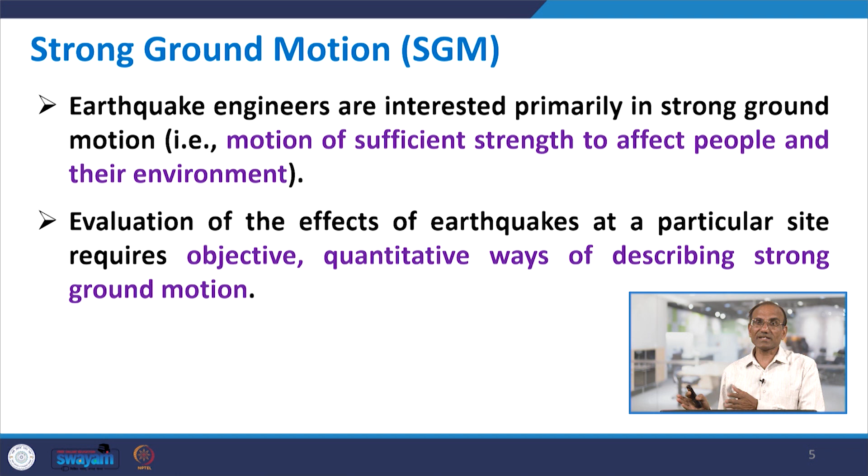To evaluate the effects of earthquakes at a particular site, it requires quantitative ways of describing strong ground motion. We need to quantify that in different parameters. So what are the parameters which quantify this strong ground motion, we are going to talk today.

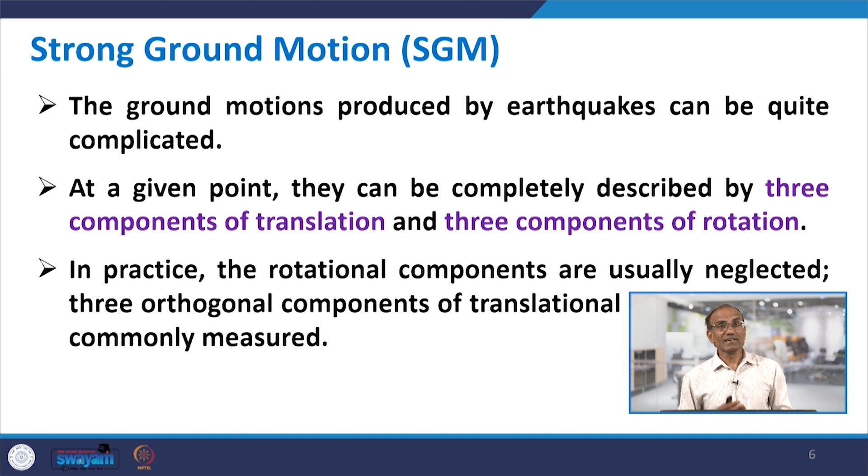The ground motions produced by earthquakes are mostly quite complicated. At a given point, they can be completely described by 3 components of translation and 3 components of rotation. In 3D space, you have 3 components of translation, like x, y, z coordinates, where you may have displacements and also rotations. In practice, the rotational components are usually neglected, and 3 orthogonal components of translation motion are most commonly measured.

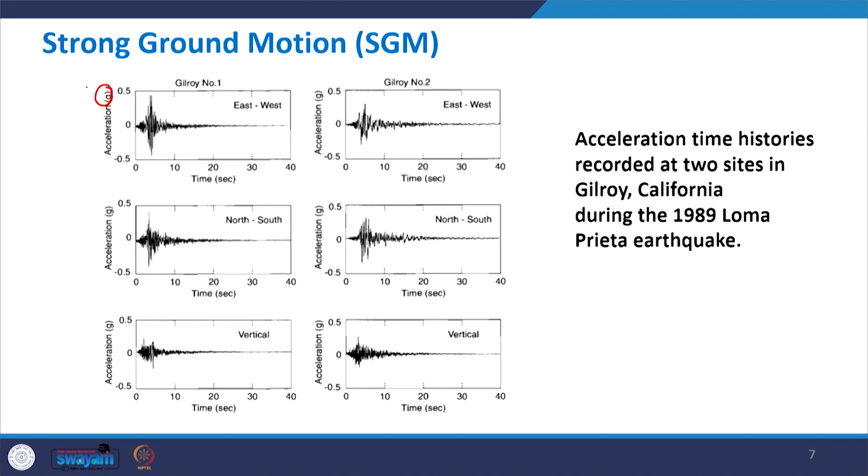In an acceleration time history, the x axis shows time in seconds, and the y axis shows acceleration, normally represented in terms of g, the acceleration due to gravity. So here, for example, 0.5 g, where 1 g is nothing but 9.81 meters per second square.

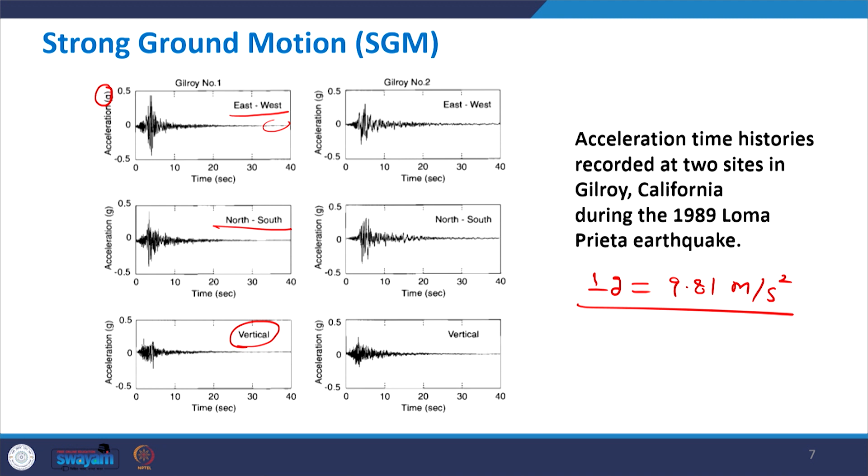For both sites we have three components of acceleration time history: east-west component, north-south component, which can generally be called lateral or horizontal components, and the third is the vertical component. All three components together completely describe the earthquake time history, for Gilroy number 1 as well as the second site. In these records, the values fluctuate a lot, starting from 0, reaching some peak value, and after the peak decreasing again, until at the end it becomes almost 0. When it becomes 0, that indicates the duration of the earthquake, which we will discuss in detail later.

Continuing with strong ground motion, what are the techniques for its measurement?

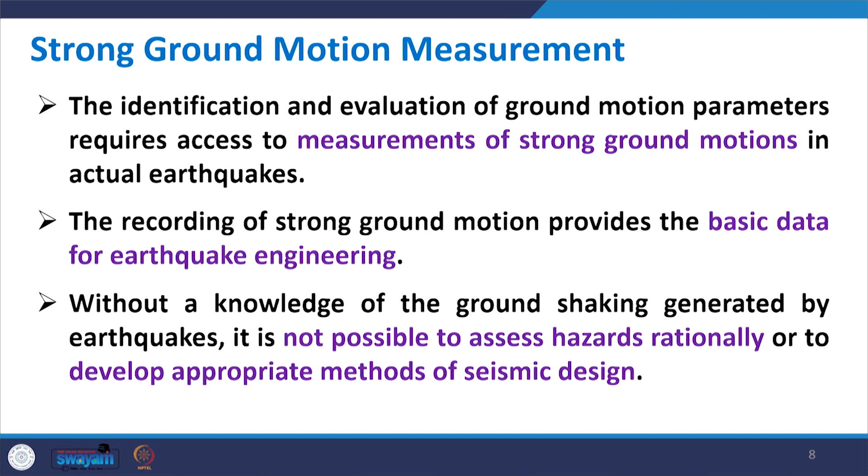The identification and evaluation of strong ground motion parameters requires some measurements for actual earthquakes, and the recording of strong ground motions provides the basis for earthquake engineering. Without knowledge of the ground shaking, it is not possible to assess hazard rationally or develop appropriate methods for seismic design. So we need to measure the strength of the ground motion, and accordingly design our structures or foundations so that they can survive.

Relatively weak ground motions are measured by seismographs, and the records they produce are called seismograms. Here there is one controversy: seismograph is not a graph, rather seismograph is an instrument which measures the earthquake, and the earthquake record itself is called a seismogram. So this should be clear, seismograph is an instrument which measures.

So for measurement of relatively weak ground motion we use seismographs, but for strong ground motions normally they are measured using what we call accelerographs, because our objective is to measure the acceleration time history, which is called an accelerogram.

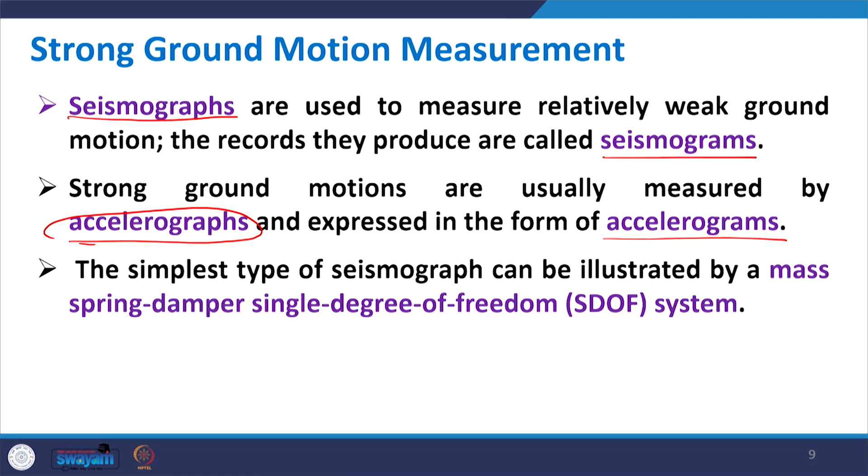The simplest type of seismograph can be illustrated by a single degree of freedom system, which consists of a mass, spring and damper. This is taken from Kramer's book. This is a simple ground motion measurement system, like a single degree of freedom system, with a mass and stiffness K and a damper C.

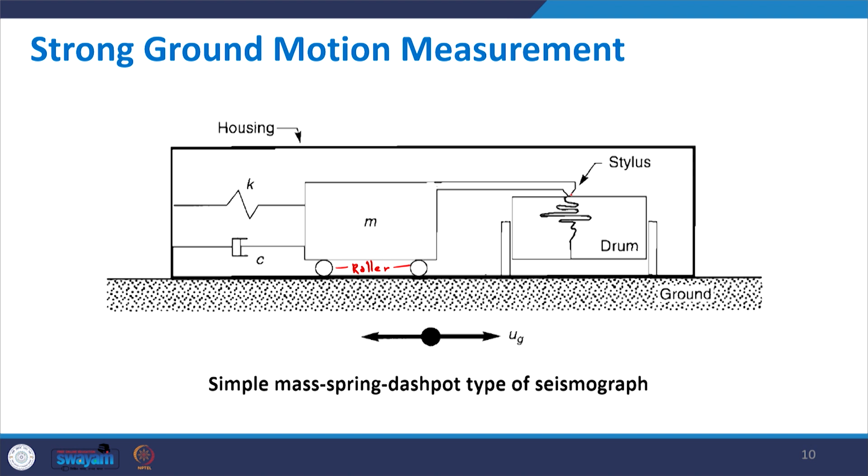This mass is situated on rollers, two rollers are there. When an earthquake wave comes in the lateral direction, the mass will move like this. As a result, this attachment will move, and there is a drum which moves vertically. On this moving drum you have a pen which will mark the wave, because due to the earthquake vibrations it will move and record while the drum is rotating.

This was normally the earlier design, because digital systems were not yet available, and usually the first kind of seismograph was like this. It was invented quite a long time ago, and successfully used since then. As I mentioned earlier, the first engineering record of an earthquake was during the 1940 El Centro earthquake.

The relative movement of the mass and the ground is indicated by the trace made by the stylus on the rotating drum, which we already discussed. A typical seismograph has 3 seismometers oriented to record motions: one vertical and two perpendicular horizontal directions.

Most accelerometers currently in use are transducers that produce an output in terms of voltage, which is proportional to acceleration. That means there is a variation in the voltage, and when acceleration increases, the voltage will be high.

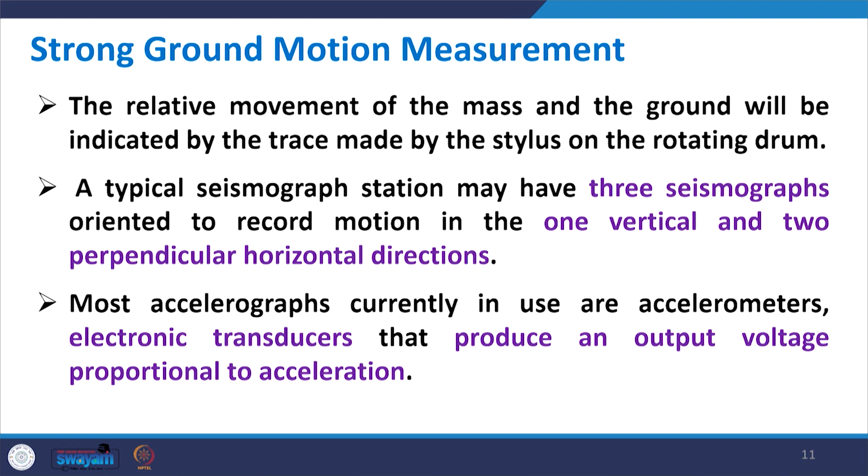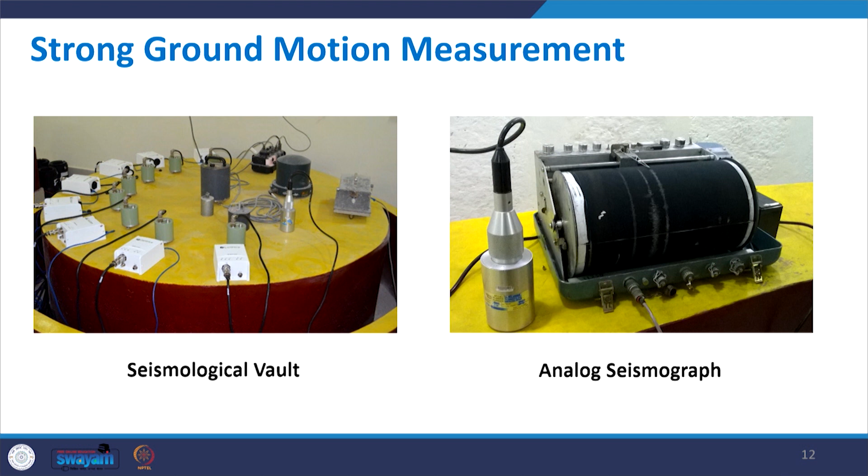Here are strong ground motion measurements. On the left hand side is a seismological vault, and on the other side are analog seismographs. Both of these photographs are taken from our seismology observatory located in the Department of Earthquake Engineering at IIT Roorkee, from our own lab. There is a vault, and at the bottom there is a base, on top of which, like on rock, instrumentation is done, normally called sensors. On the right hand side a zoomed picture of one of the instruments, an analog seismograph, is shown.

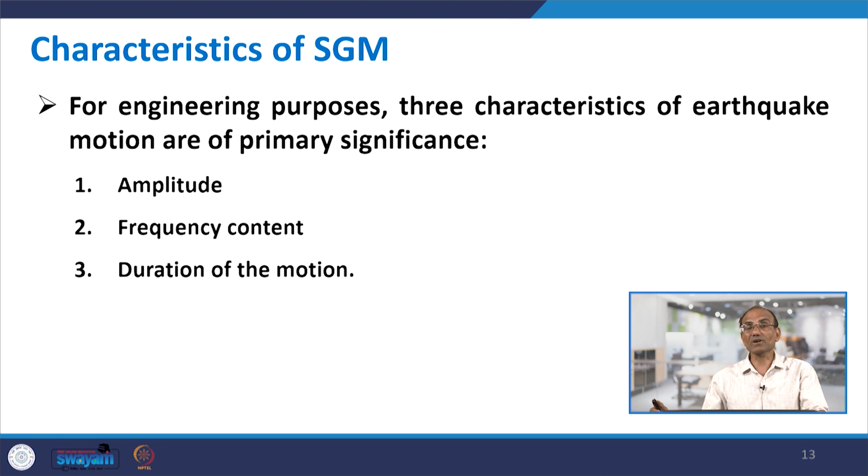Now it is time to characterize the SGM, which stands for strong ground motion. For engineering purposes, it is important that we characterize earthquake motions, and this is normally done using 3 parameters. First is amplitude of the motion, which indirectly measures energy content. Then you have frequency content, how the peaks and troughs change with time. And duration of the motion, meaning how long the earthquake shaking lasts. These 3 parameters together help characterize a strong ground motion, and in the next slides we will discuss each one by one.

Normally for amplitude, acceleration content parameters are used. The amplitude which represents acceleration can be represented by either acceleration, velocity, or displacement.

Similarly, for acceleration time histories, there is one difference: a significant portion of the time history is normally in the high frequency range, while displacement time history is dominated by relatively low frequency motion. So for high frequency, acceleration time history will have a large portion, while displacement time history has low frequency contents.

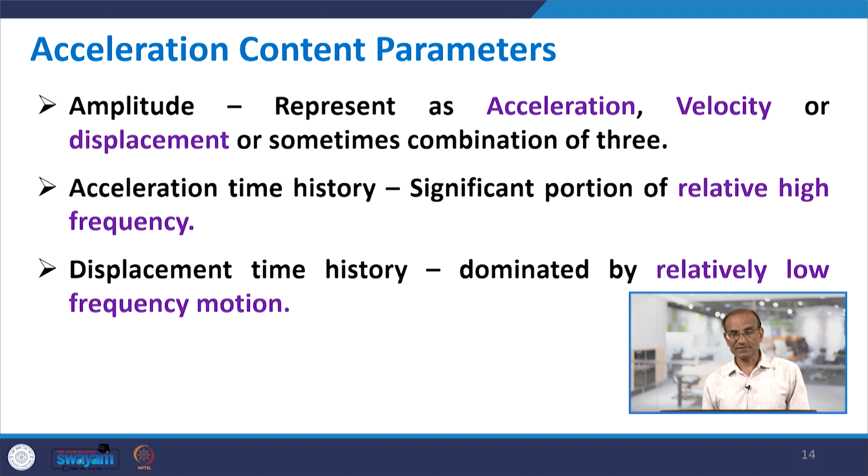For example, this is one of the acceleration time histories from the Bhuj earthquake of 2001, this is the lateral component. On the y axis you have acceleration and on the x axis you have time. This record lasted about 75 seconds, but you could see the signals are very weak up to 30 seconds. In the initial 30 seconds the peak values are very low, but after around 32 seconds there is suddenly a jump, and you get peak values around 47 seconds.

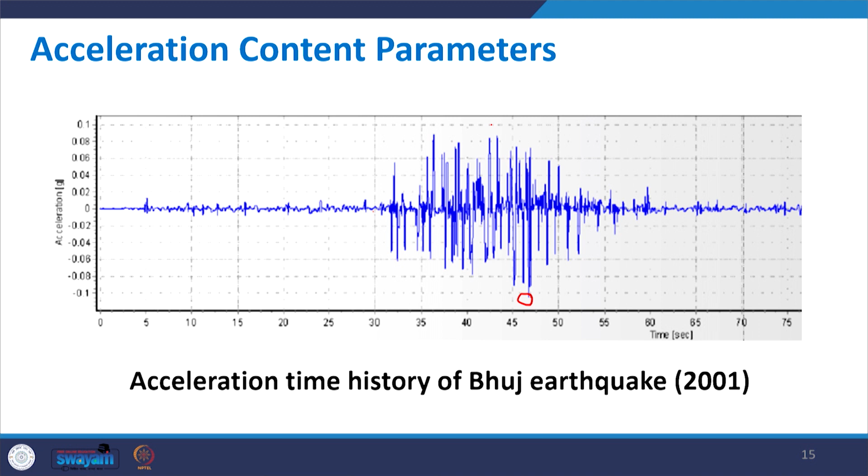When we talk about peak, our meaning is the absolute peak, it does not matter whether it is on the positive side or negative side. Here the maximum value is more than 0.1, but that is happening towards the negative side, so the peak will be here, not on the other side. So irrespective of whether it is positive or negative, we consider it the peak.

Now we collect the peak values and then we further process them. For the amplitude, the most commonly used measure is called the peak horizontal acceleration, PHA. This is the maximum value of acceleration in the horizontal direction, and the PHA for a given component is simply the largest absolute value of horizontal acceleration, where absolute means it can be on the positive side or negative side.

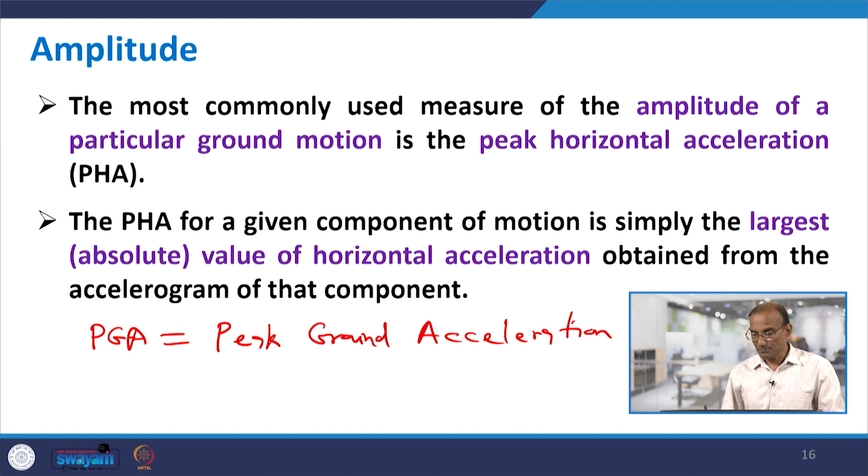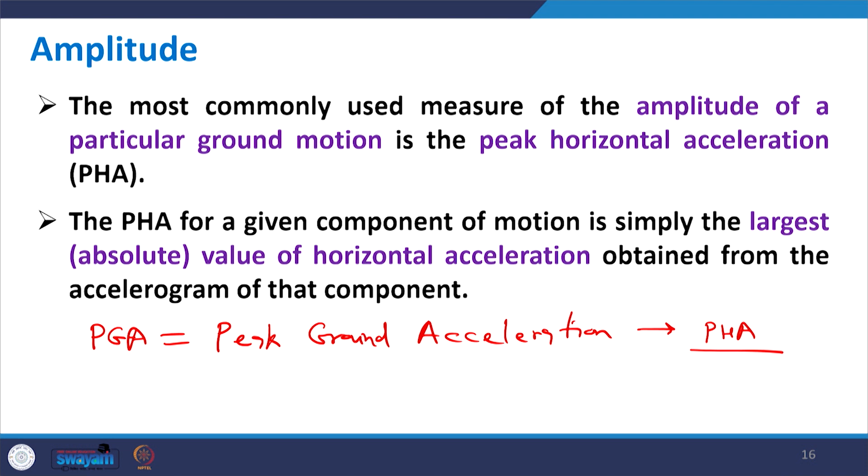Most of the time, instead of PHA, PGA is used, which stands for peak ground acceleration, and this term is widely used. Here instead of PGA we use PHA because it gives more clarity. When we write PHA, it is clear that this peak is in the horizontal direction, but PGA could be either horizontal or vertical. However, if nothing is written with PGA, it is considered to be in the horizontal direction, because the peak value in the horizontal direction is more important than in the vertical direction. We will discuss this later again.

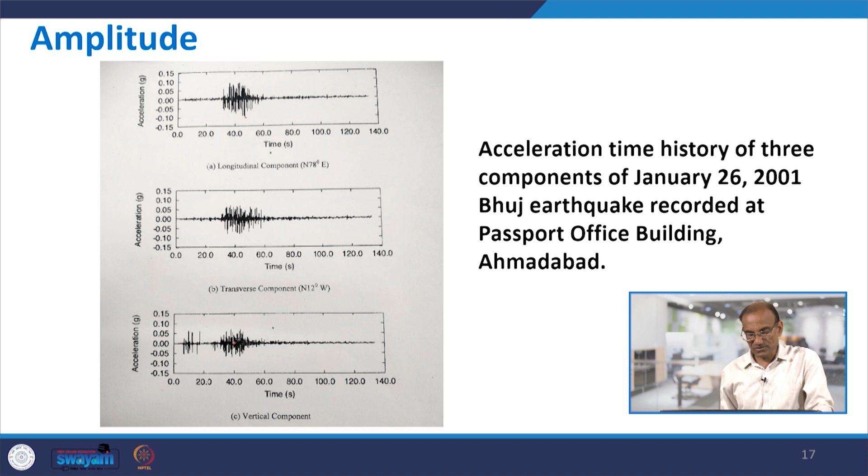So the first two components are both horizontal components, and the third one is the vertical component. Normally the vertical component's peak values are less than the two horizontal components, as you can see in both figures, the amplitude is less. Out of the two horizontal components, longitudinal or transverse, whichever gives the higher peak value, we consider that for determining PGA or PHA. Here the top one has slightly higher values, about 0.1, but the other is less than this. The maximum value here is around 0.07, and for the vertical it is around 0.05 only. So this was about the records obtained from the Bhuj earthquake.

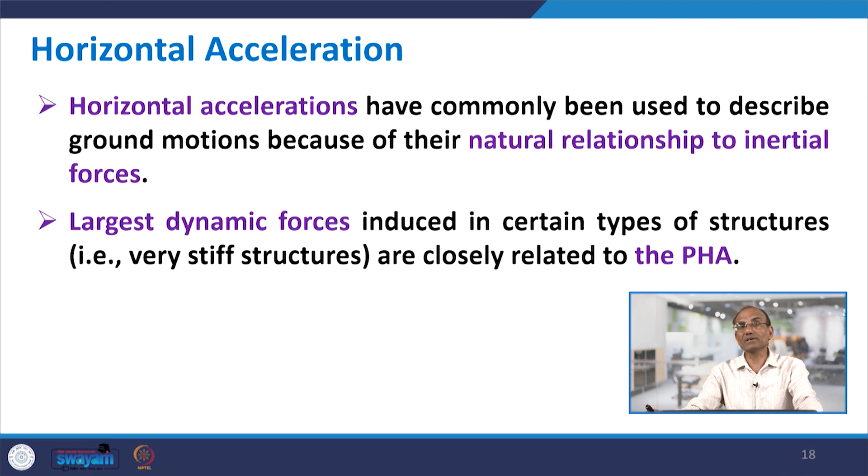Continuing with that, we further explore horizontal accelerations. They have commonly been used to describe ground motions because of their natural relation to inertial forces, since inertial forces are governed by horizontal acceleration. Basically, inertial force is simply mass multiplied by horizontal acceleration. That is why this is important, and the largest dynamic forces induced in certain types of structures, that is very stiff structures, are closely related to what we call PHA, peak horizontal acceleration.

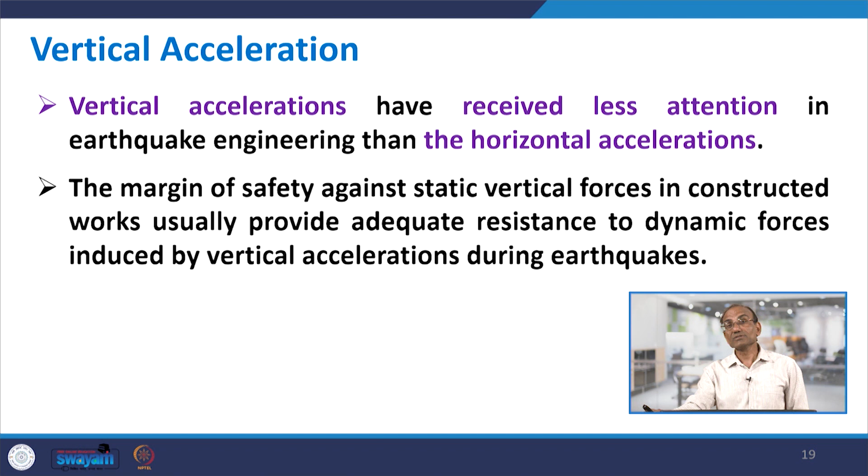Vertical accelerations have received less attention in earthquake engineering than horizontal accelerations, and the margin of safety against static vertical forces in constructed works provides adequate resistance to dynamic forces induced by vertical acceleration during earthquakes. So basically, for earthquake engineering, structures designed for static load already survive without earthquake, since that design is done for vertical loads.

But what happens during the earthquake is there is a lateral component, which means not only vertical force but horizontal force is also applied, and as a result, most structures designed only for vertical force, assuming there is no earthquake, can take the vertical force because they may have enough strength. But because the earthquake also applies force in the horizontal or lateral direction, if the structure or building is not designed for that earthquake lateral force, then it is going to be damaged or even collapse.

That is why, when we consider the earthquake, if we can consider all three components, both horizontal and the vertical component, that is the best thing. However, for many engineering analyses, only one component is considered, and if only one component is considered, it will be the horizontal component, not the vertical component. Out of the horizontal components, we consider the one that gives the highest value of PHA.

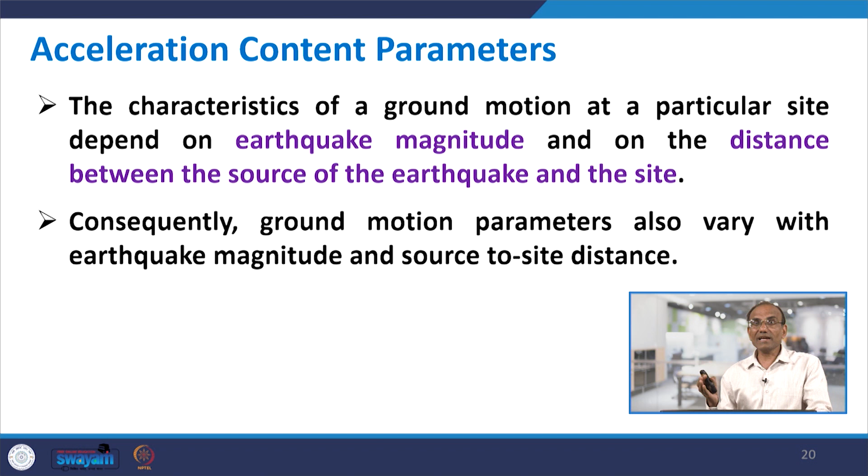The characteristics of ground motion at a particular site depend on earthquake magnitude and on the distance between the source of the earthquake and the site—how much is the magnitude and how far is the site from the epicenter. As a result, ground motion parameters also vary with earthquake magnitude and source-to-site distance. These are the governing parameters; if earthquake magnitude increases, the ground motion parameter is expected to be higher.

For engineering purposes, the peak vertical acceleration is often assumed to be 2/3 of the PHA. So if we have a single record—say only the peak horizontal acceleration time history, and no vertical record—but need to design for both horizontal and vertical loads, our code IS 1893 suggests the same thing. This is recommended by the Indian Standard Code IS 1893, Part 1, latest version 2006: vertical acceleration can be considered as 2/3 of the horizontal one.

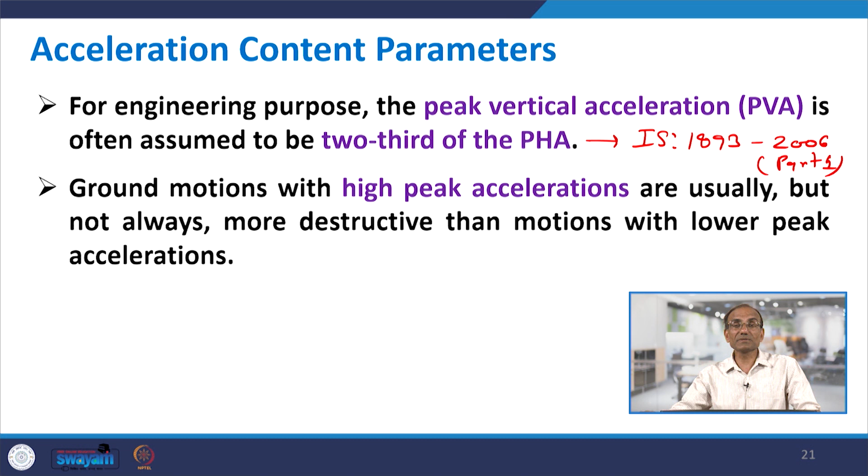Ground motions with high peak accelerations are usually, but not always, more destructive than motions with lower peak accelerations. Naturally, if the peak acceleration value is higher, it is normally more destructive, though not always, because it depends on other things like frequency content, which we will discuss later. But most of the time this is the case.

However, very high peak acceleration lasts only for a few seconds, a very short period of time, and if it is sustained for only a very short time, it may cause little damage to many types of structures. So it also depends on how long this peak value is sustained—whether for a fraction of a second or a few seconds.

Although peak acceleration, PHA or PGA, is a very useful parameter, it does not provide any information on the frequency content or duration of the motion. These latter two parts—frequency content and duration—are also important when we design structures.

A number of earthquakes have produced peak acceleration in excess of 0.5g. It has been observed in the past that even when PGA reached 0.5g, there was no significant damage to structures. Why? Because this peak acceleration occurred at very high frequencies and the duration of the earthquake was not long—in a few seconds it ran very fast. The peak acceleration was there, but it came momentarily, for a fraction of a second, and then moved on. So in that case, not much damage was caused.

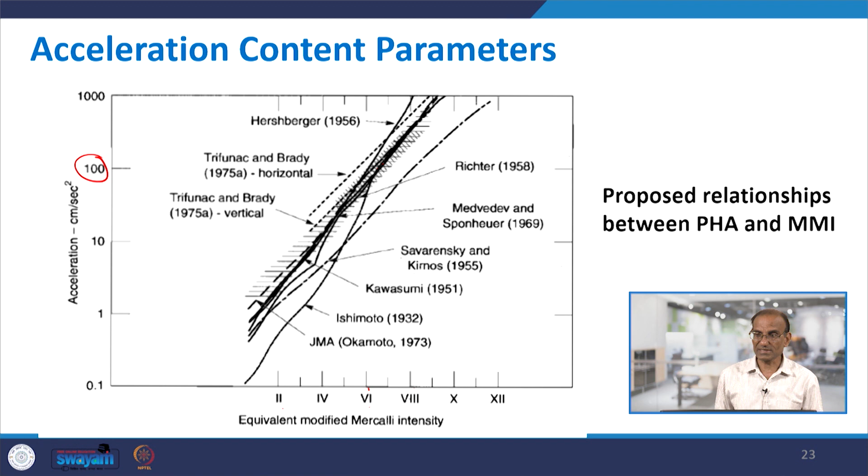If you get less intensity, suppose a value between 6 and 7, you should go on the higher side rather than average. In Roman numerals, intensity should be a whole number; it cannot be 6.5 or 6.8.

Coming to the next parameter for characterization of amplitude: velocity. We discussed acceleration for high frequency and displacement for low frequency, but velocity works at intermediate frequency. Velocity is characterized by the parameter PHV, peak horizontal velocity. Earlier we had PHA, peak horizontal acceleration; here we have PHV, another useful parameter for characterizing ground motion amplitude.

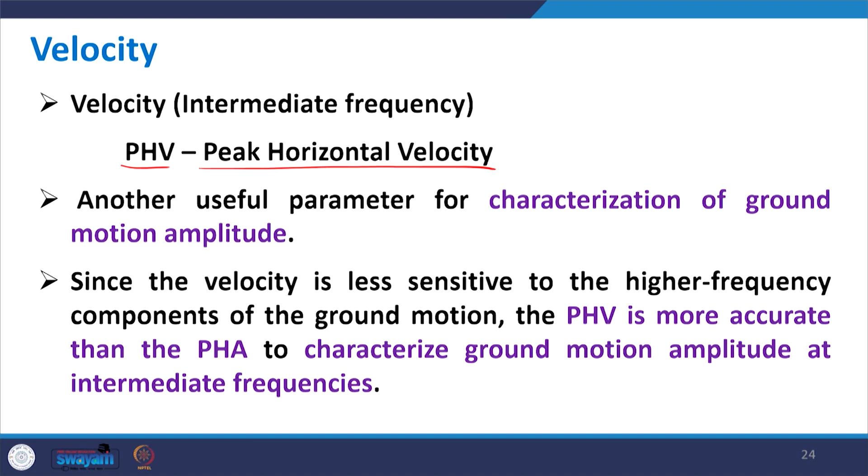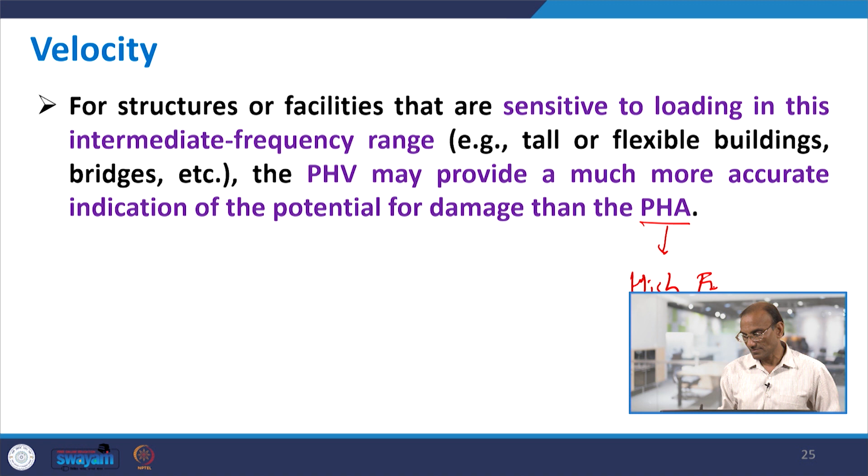Since velocity is less sensitive to the higher-frequency components of ground motion, PHV is more accurate than PHA for characterizing ground motion amplitude at intermediate frequencies. Structures or facilities sensitive to loading at these intermediate frequencies, for example tall or flexible buildings and bridges, PHV may provide a more accurate indication of damage than PHA, because PHV works in the intermediate frequency range while PHA works in the high frequency range.

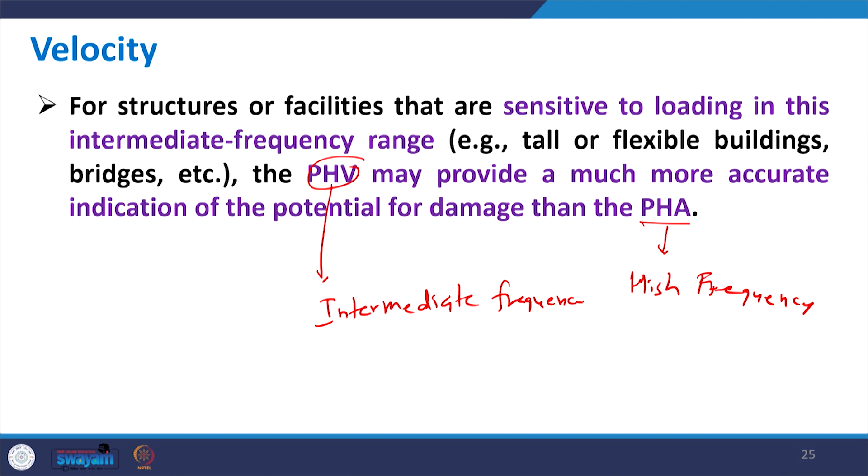The third component to describe amplitude is displacement. Displacement works at lower frequency, and peak displacements are generally associated with the lower frequency components of earthquake motion. Since it is difficult to determine accurately due to signal processing errors from filtering and integration of accelerograms at the low frequency side, peak displacement is less commonly used as a measure of ground motion than peak acceleration or peak velocity.

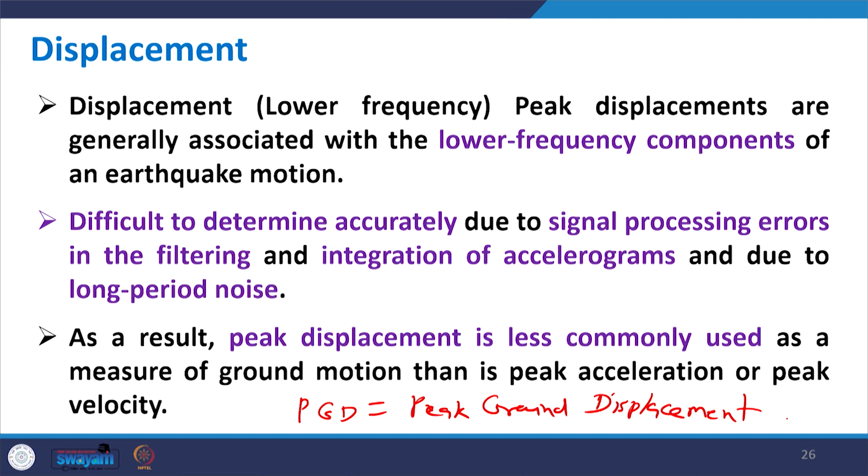Sometimes peak ground displacement is called PGD, but as mentioned, due to those reasons, PGD is less used compared to PHA or PHV.

Then we have sustained maximum acceleration, another parameter for measuring amplitude. This parameter was given by a researcher named Nuttli, who used lower peaks of the accelerogram to characterize strong ground motion by defining sustained maximum acceleration for 3, 4 or 5 cycles as the third or fifth largest value of acceleration in the time history.

So here, in a time history, you select the largest values, and out of these, up to 3 to 5 cycles are used to define this sustained acceleration.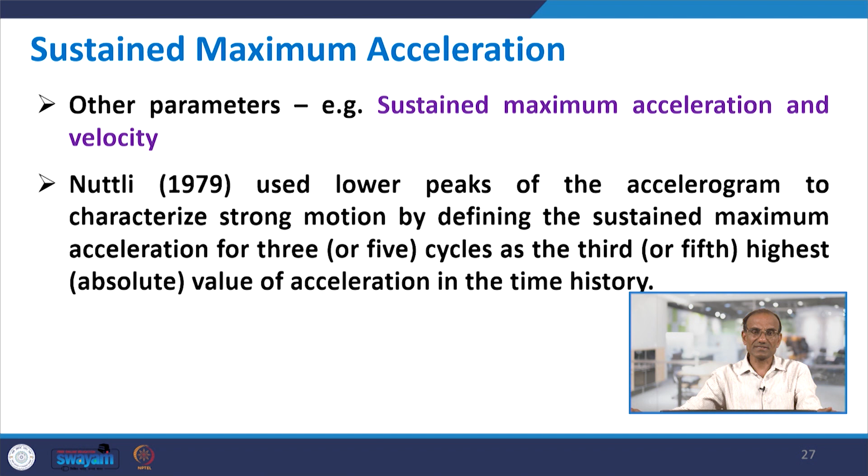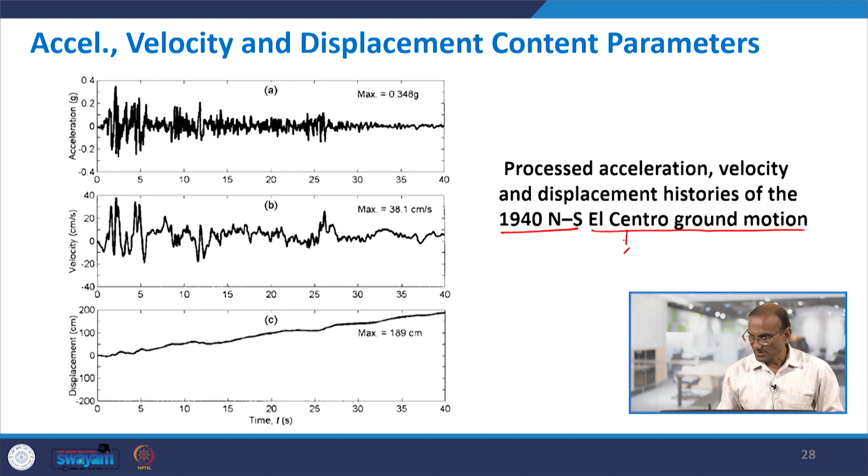Let's look at an example: acceleration, velocity, and displacement content parameters from the 1940 NS component of the El Centro earthquake, which occurred in California, USA.

The acceleration time history shows a maximum peak of 0.348, verifiable at this peak value. The velocity time history shows a maximum value of 38.1 centimeters per second, again at this peak.

When you go from acceleration to velocity time history, frequency contents that were close together in acceleration become scattered in velocity. But in displacement time history, it becomes flat, with no peaks or troughs, instead continuously increasing. When shaking completes, you get the maximum displacement at the end, around 189 centimeters.

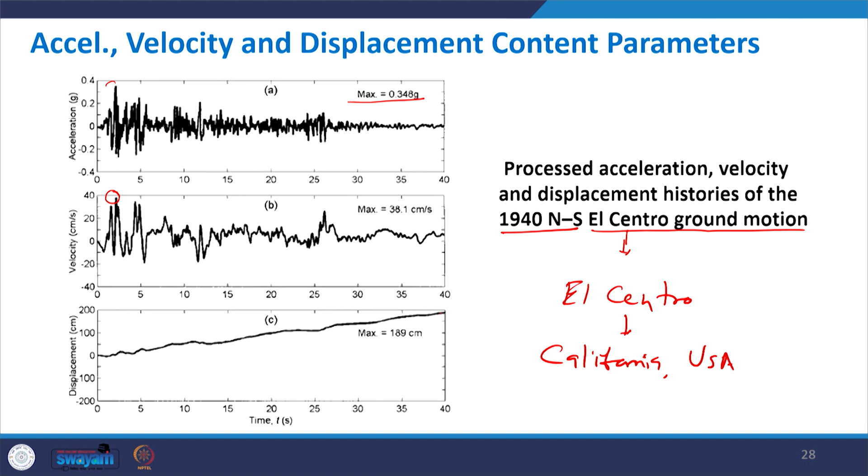Similarly, this is for the Gilroy stations during the Loma Prieta earthquake, as discussed. Gilroy east-west component, stations 1 and 2 — number 1 is for rock, number 2 is for soft soil. We see acceleration time history, velocity time history, and displacement time history.

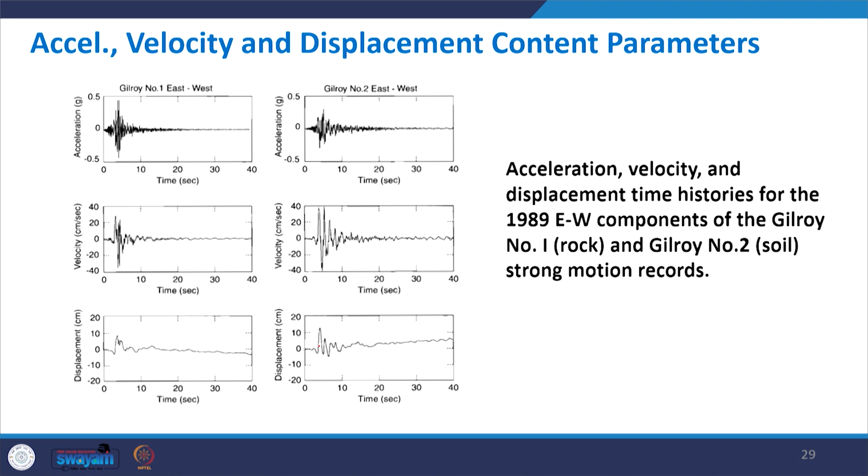Interestingly, the acceleration time history peak value is higher for site 1 than site 2, but in velocity time history it's the other way around — the peak value is more for Gilroy number 2, due to the effect of local soil conditions. Displacement is also higher compared to site 1. So, this was all about strong ground motion.